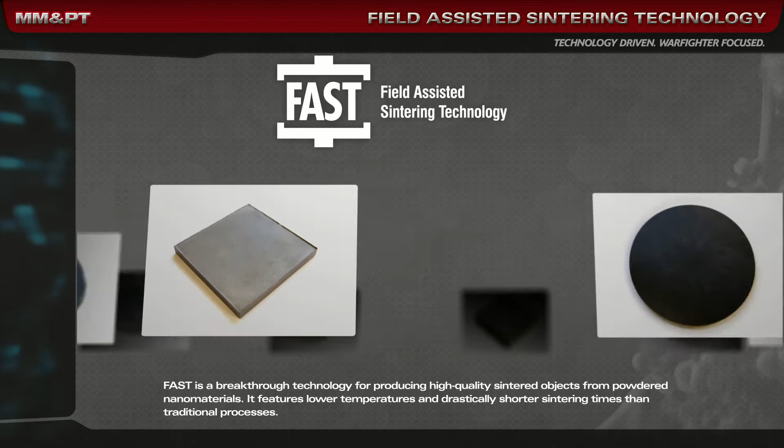FAST is a breakthrough technology for producing high-quality sintered objects from powdered nanomaterials. It features lower temperatures and drastically shorter sintering times than traditional processes. These nano-engineered materials can provide new capabilities for the warfighter in force protection, lethality, and sustainability. Capabilities previously unavailable to Army designers and engineers.

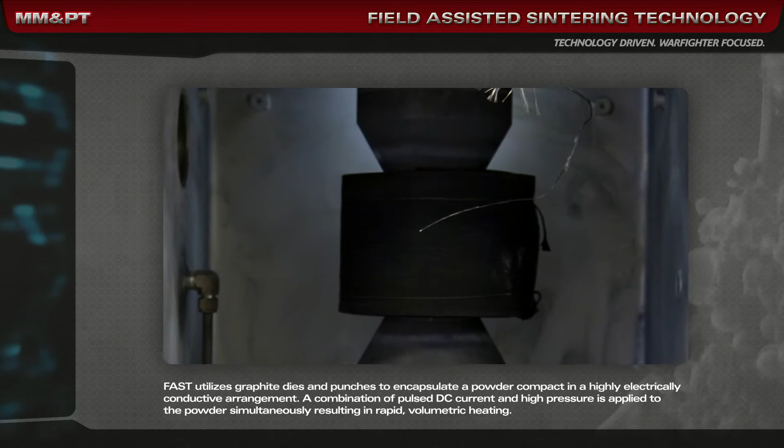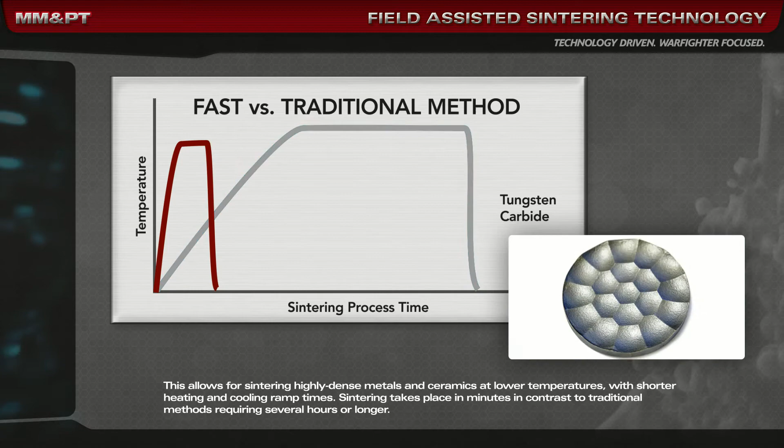FAST utilizes graphite dies and punches to encapsulate a powder compact in a highly electrically conductive arrangement. A combination of pulsed DC current and high pressure is applied to the powder, simultaneously resulting in rapid volumetric heating. This allows for sintering highly dense metals and ceramics at lower temperatures, with shorter heating and cooling ramp times. Sintering takes place in minutes, in contrast to traditional methods requiring several hours or longer.

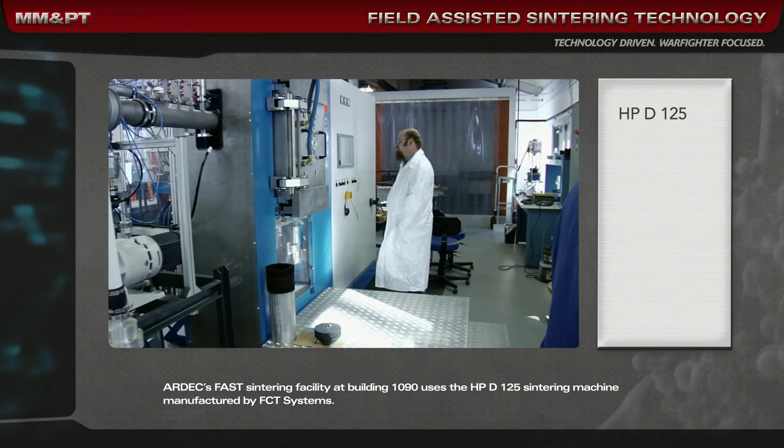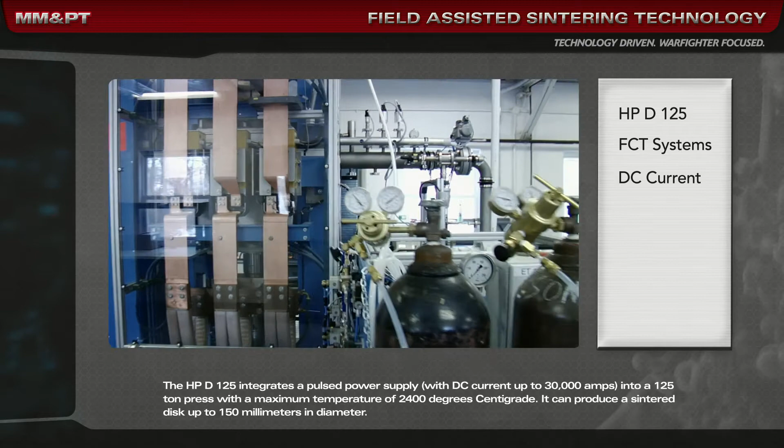ARDEC's FAST sintering facility at Building 1090 uses the HPD-125 sintering machine manufactured by FCT Systems. The HPD-125 integrates a pulsed power supply with DC current up to 30,000 amps into a 125-ton press with a maximum temperature of 2400 degrees centigrade. It can produce a sintered disc up to 150 millimeters in diameter.

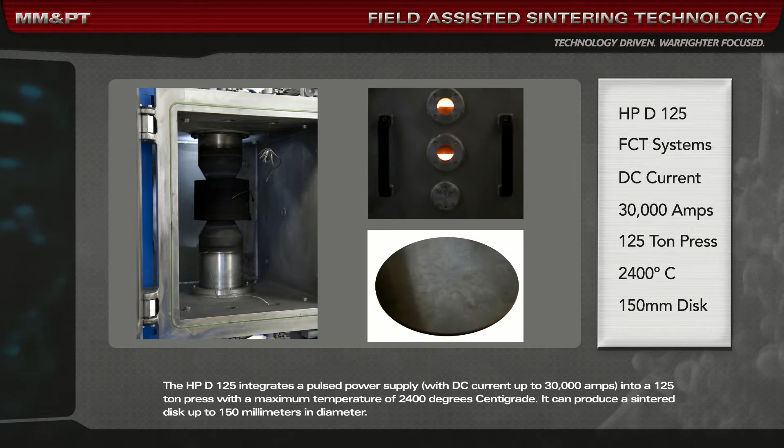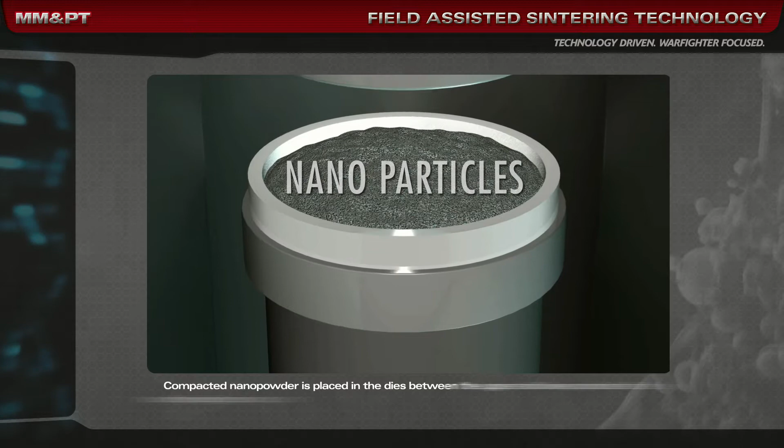Now take a look inside the FAST process. Compacted nanopowder is placed in the dies between the upper and lower punches of the sintering equipment. The punches maintain consistent pressure to the compact while pulsed DC current is applied to the dies and the nanopowder. The high current generates joule heating at the particle-to-particle contacts, providing true volumetric heating. This is in contrast to conventional sintering, which heats materials from the outside inward.

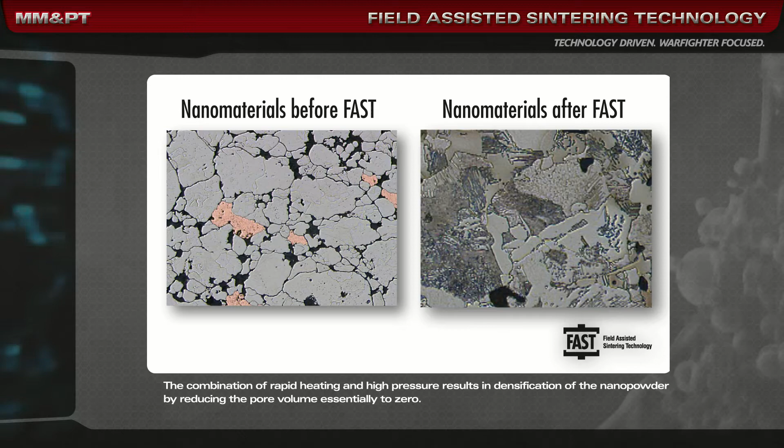The combination of rapid heating and high pressure results in densification of the nanopowder by reducing the pore volume essentially to zero. The highly localized joule heating which occurs at the particle-to-particle contacts allows for elevated surface diffusion and a subsequent continuous closing of pores in between the individual nanoparticles. The result is a bulk material that maintains its original nanostructure and therefore its nanomaterial properties.

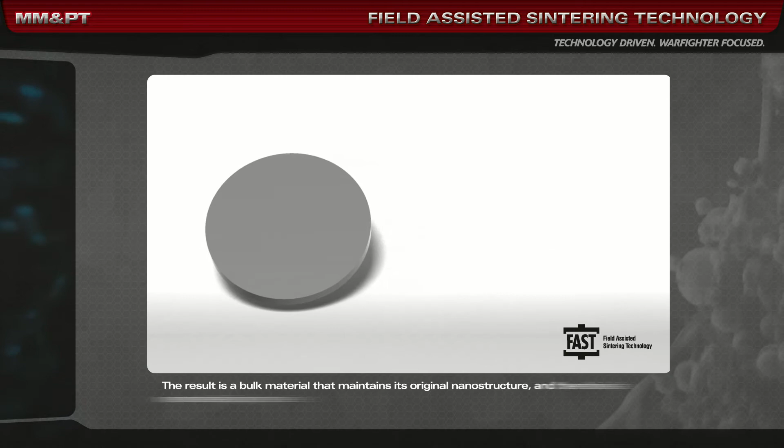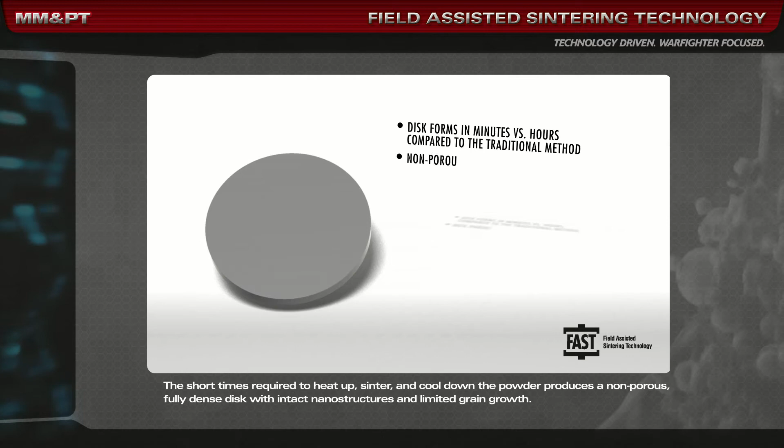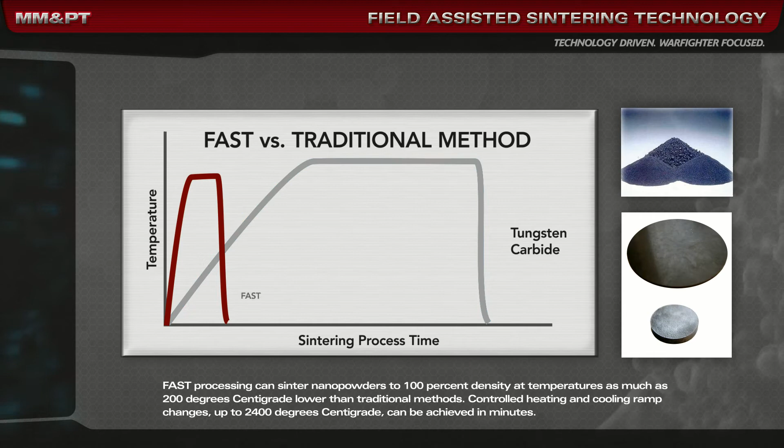The sintered disc is formed in just minutes. The short times required to heat up, sinter, and cool down the powder produces a non-porous, fully dense disc with intact nanostructures and limited grain growth. FAST processing can sinter nanopowders to 100% density at temperatures as much as 200 degrees centigrade lower than traditional methods. Controlled heating and cooling ramp changes, up to 2400 degrees centigrade, can be achieved in minutes.

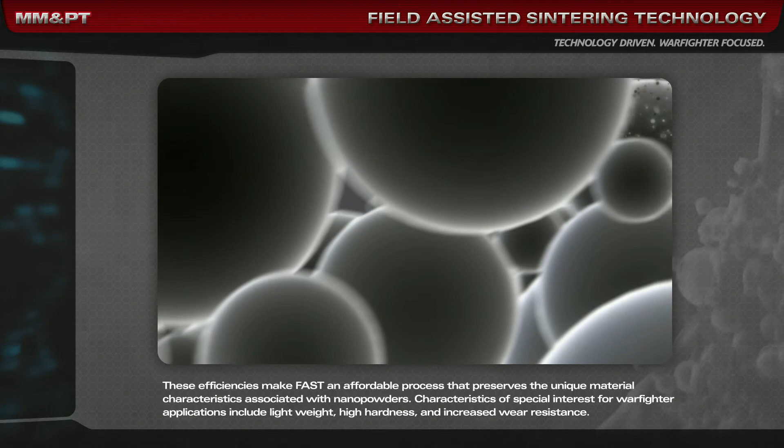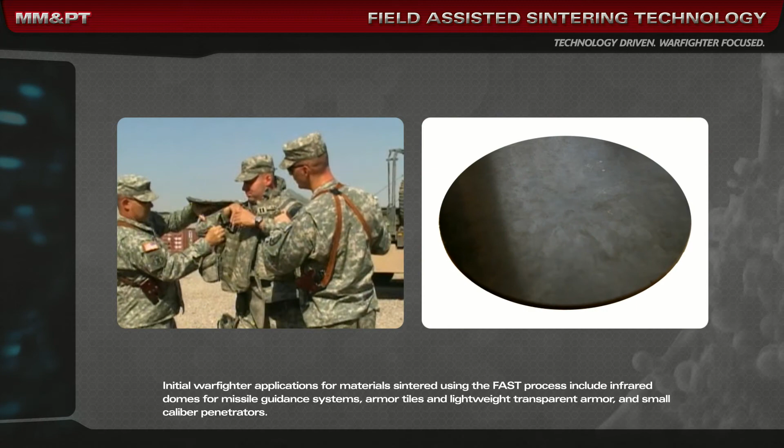These efficiencies make FAST an affordable process that preserves the unique material characteristics associated with nanopowders. Characteristics of special interest for warfighter applications include lightweight, high hardness, and increased wear resistance. Initial warfighter applications for materials sintered using the FAST process include infrared domes for missile guidance systems, armor tiles and lightweight transparent armor, and small caliber penetrators.

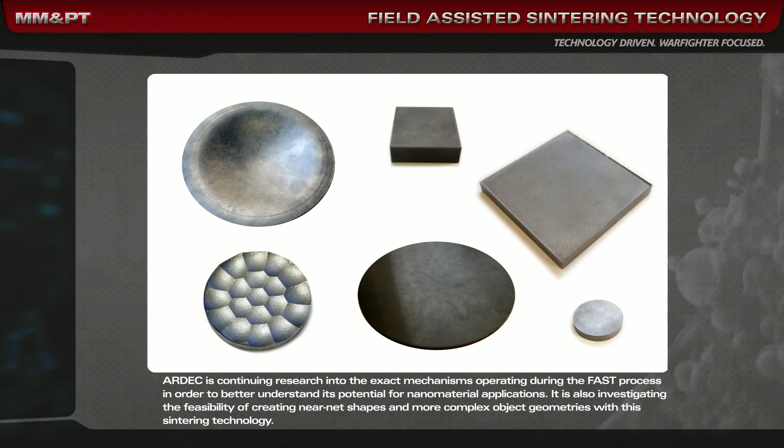ARDEC is continuing research into the exact mechanisms operating during the FAST process in order to better understand its potential for nanomaterial applications. It is also investigating the feasibility of creating near-net shapes and more complex object geometries with this sintering technology. Nanotechnologies can provide leap-ahead advances in both military and commercial product development that give the U.S. warfighter a decisive edge in contemporary and future conflicts.